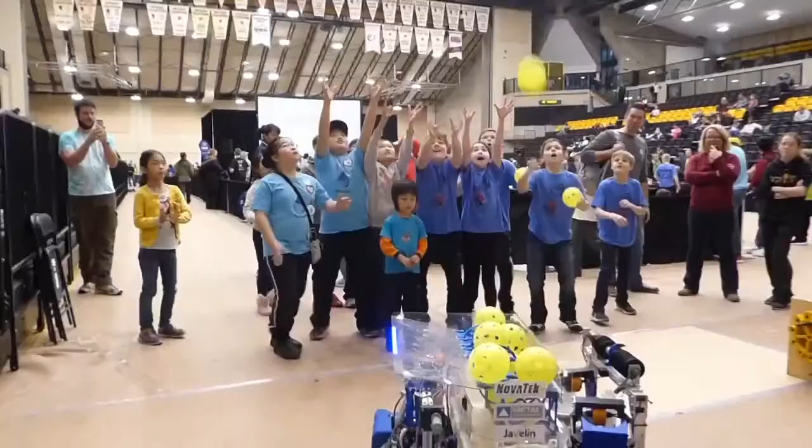It takes is a spark of curiosity, of interest, of delight, to ignite a flame of passion that burns brightly and sends lives onto a new path. We are the spark. We are the Rebels.

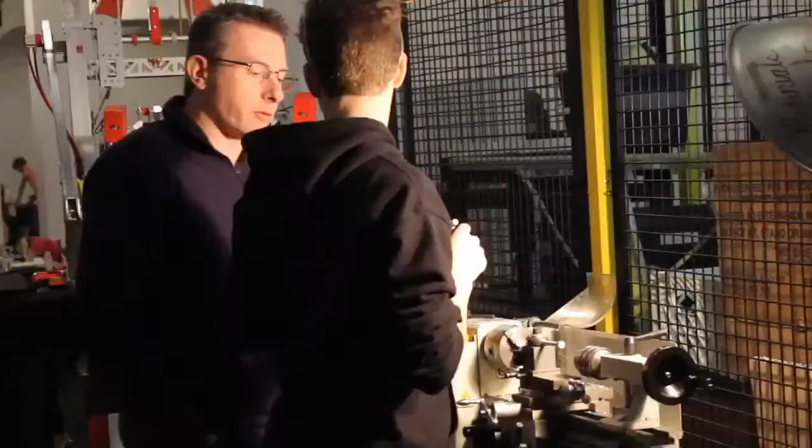Our team started in 2008 at Eastwood Collegiate Institute, making us the longest-running FRC team in Waterloo Region. Like a spark, we started out small and grew. In 2017, the Rebels became a community team, accepting students from all over the region and tripling in size, making FIRST more accessible to all students in our community. With this increase in members, our passion for innovation and discovery grows. Despite our size, we kept the mindset of a small team, encouraging all students to explore every aspect of the FIRST program, providing hands-on training and learning opportunities that change lives forever.

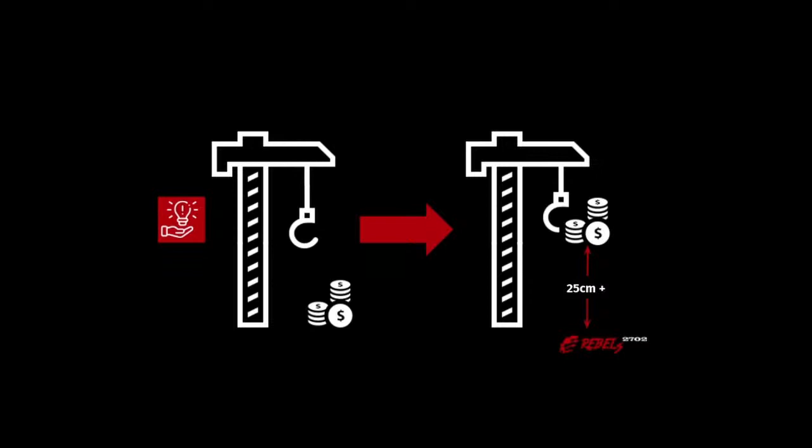This design challenge is the Elevation Challenge. Your goal is to elevate — that's a fancy word for lifting — different coins up a certain height to earn as many points as possible. Your elevator is going to need to be very strong if you want to pick up a lot of coins. Don't get too worried about how you're going to do this when you have so many ideas, because we will help you narrow them down and give you some tips on how to take on this challenge.

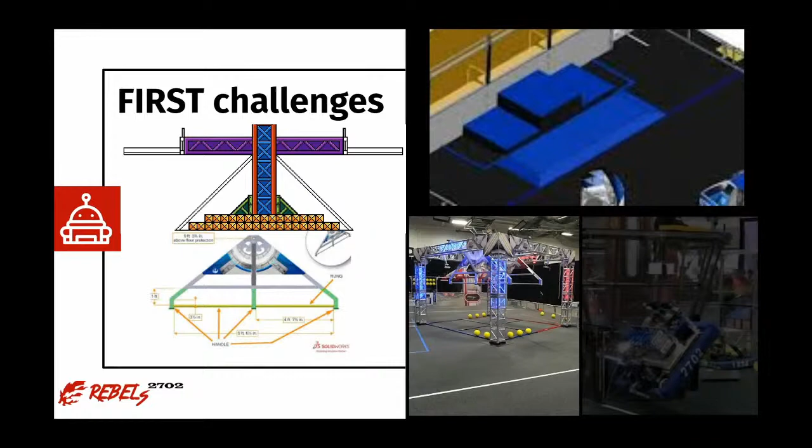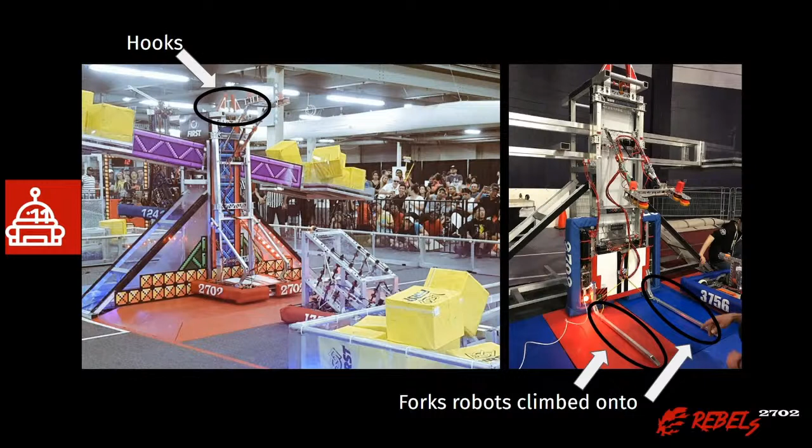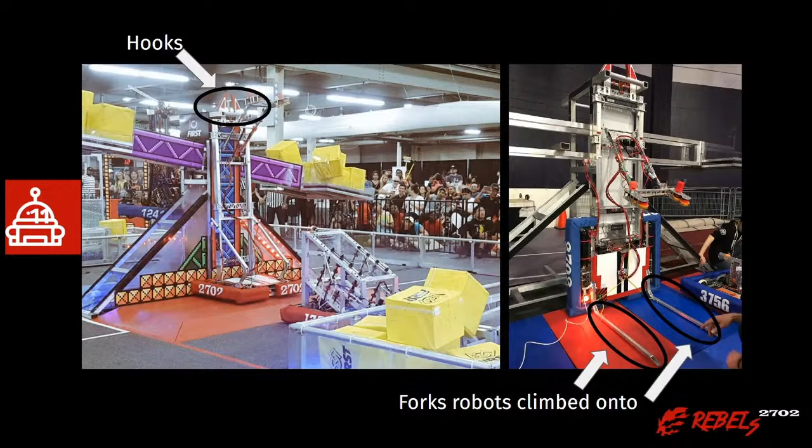The 2018 Climber Challenge was to grab onto a bar 7 feet up. It was a smaller bar that couldn't fit all 3 robots on the Alliance unless they had a smaller climber mechanism. The climber we built had 2 hooks that went in between the sides of the bars to hang on to them. To make sure another robot could climb on, we had forks that flipped down. Here's how our forks flip down.

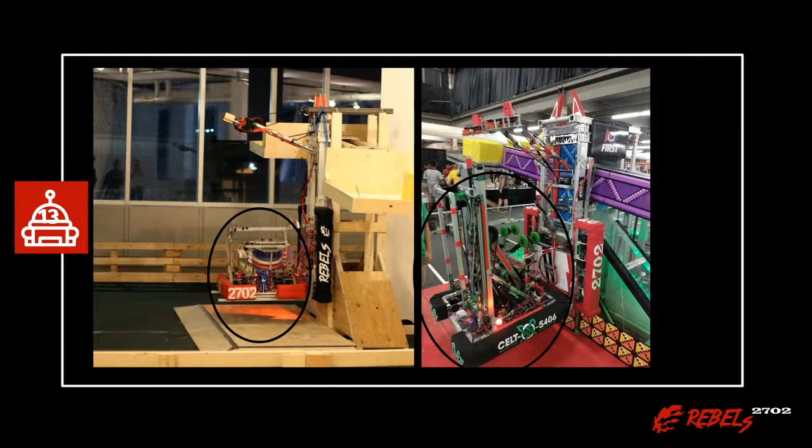After the forks extended, another robot could drive onto them. This allowed us to raise both robots up 1 foot.

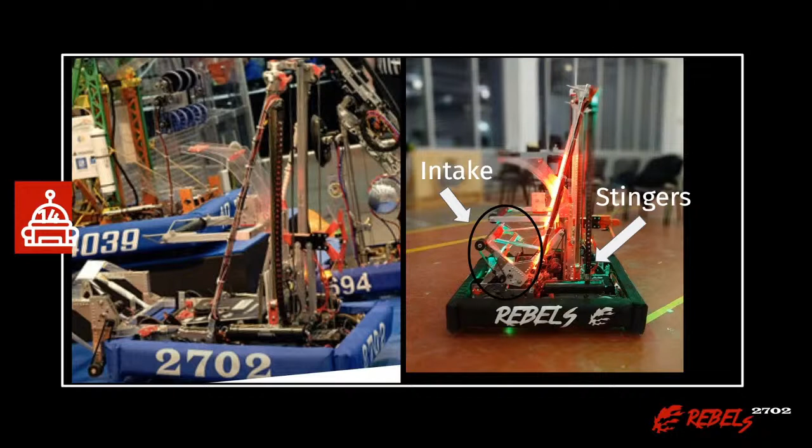Our 2019 robot had a climber that lifts the robot up a set of stairs. It uses the intake and another subsystem we call the stingers to climb up the stairs. The stingers are small poles that extend out from underneath the robot to lift the robot's back, as the intake raises the front. As we move forward, the wheels will approach the platform. Once the wheels are on the platform, we drove the rest of the way up.

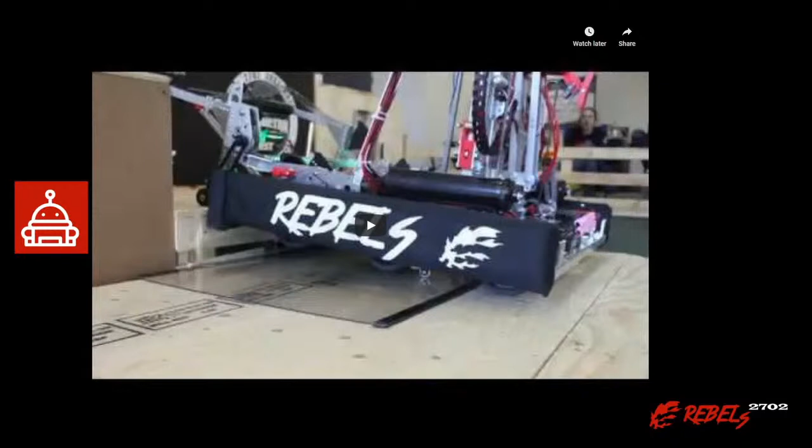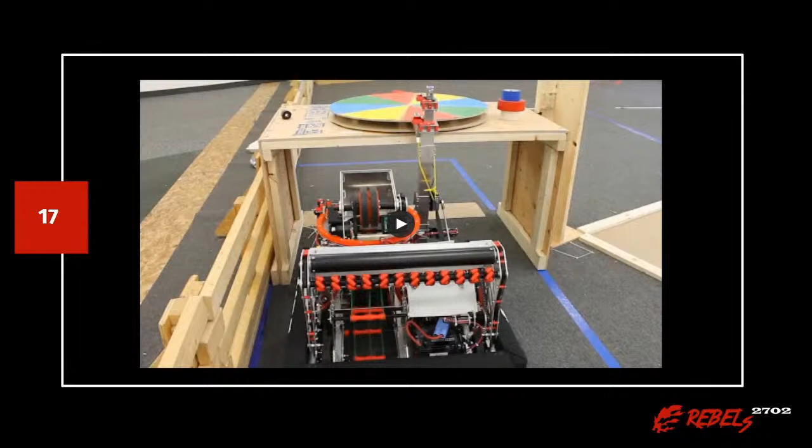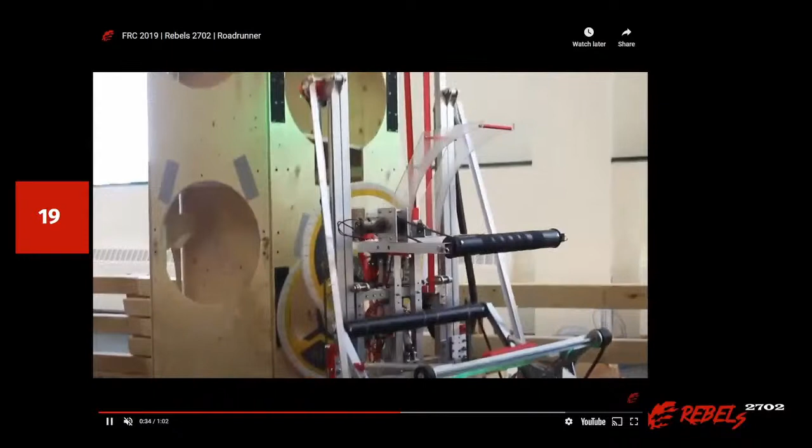Our 2020 climber lifted up our robot after attaching onto a bar that could swing. There is a pneumatic cylinder which pushes the arm up or down for the climber. For many years, our team has used pneumatics on robots. Pneumatics is pressurized air that's used to move pieces. Our 2019 hatch grabber also moved up game pieces using pneumatics to pick up and place game pieces.

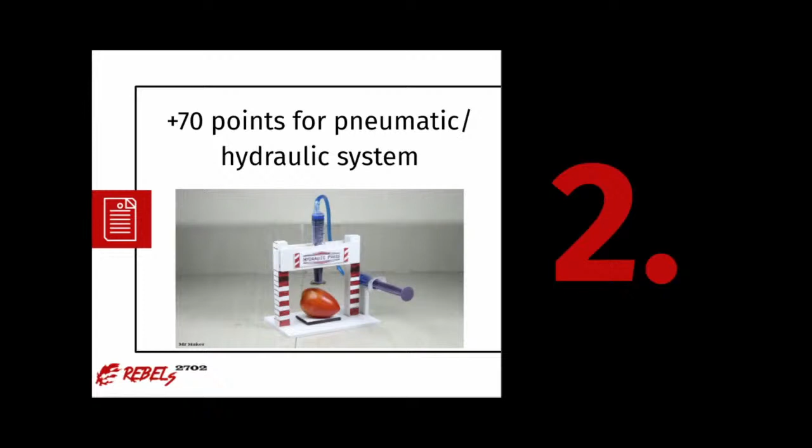Second, because the main theme of this livestream is pneumatic systems, we'll give you an extra 70 points if you use such a system in your design. So, unless you have 70 points worth of coins, use a pneumatic system. But don't worry, Jessica will show you how to build these systems in a bit.

Third, all your coins have to start within 5 centimeters from the ground, meaning that part of your mechanism can be under the coins at the start. But if you're just 1 millimeter above 5 centimeters, you're immediately disqualified. Just kidding, but seriously, don't put your coins more than 5 centimeters above the ground. It's just not cool.

Fourth, you have to lift all your coins at least 25 centimeters off the ground. But if you're a show off and decide you want to lift them like half a meter instead, be my guest. You won't get any extra points, but judges do like fancy designs.

Fifth, once you lift your coins, you're going to have to keep them up there for at least 20 seconds in order for your points to count. Now, however, showing off will be worth it. For each extra second you can keep those coins up there, you'll get 2 extra points, for a maximum of 30 points or 15 seconds.

And last but not least, when you're done lifting your coins, you have to bring them back down gently. Don't let them crash down. Imagine riding an elevator that would just freefall every time it went down. You'd be a pancake. Please treat your coins with care.

Woo, and that's basically it. Please note though that you can only indirectly operate your mechanism, meaning that you can't just lift the coins with your hand, or lift the container that's holding the coins. In fact, you shouldn't be doing any lifting at all. I mean, then what's your mechanism for?

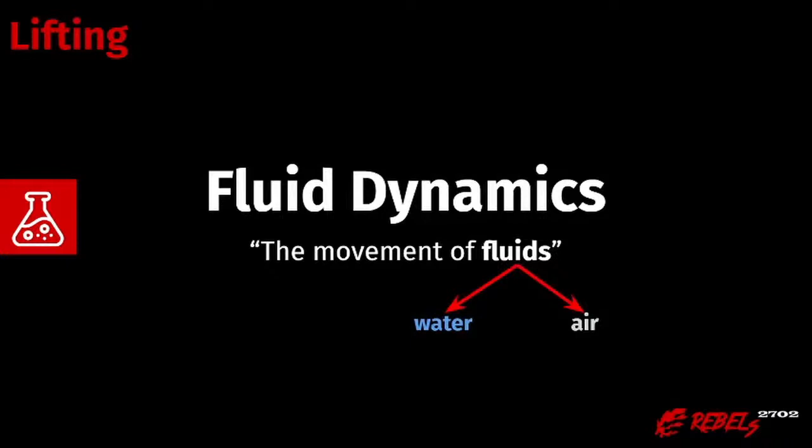Now, to really see the difference between water and air, we need to try to push both with a stick. Let's zoom into the cup and see what happens. When we apply our force, aka push, down, there are molecules in the way, so we have to push them out of the way. But there's nowhere for them to go in the direction down, so the molecules we're pushing push other molecules to get some space, and they start pushing down and to the side. Then those molecules that are being pushed to the side do the same thing, except this time they're starting to push up. This results in the molecules rising up, because that's the only place they can go, which means that our pushing force that was originally going down has been redirected to go up.

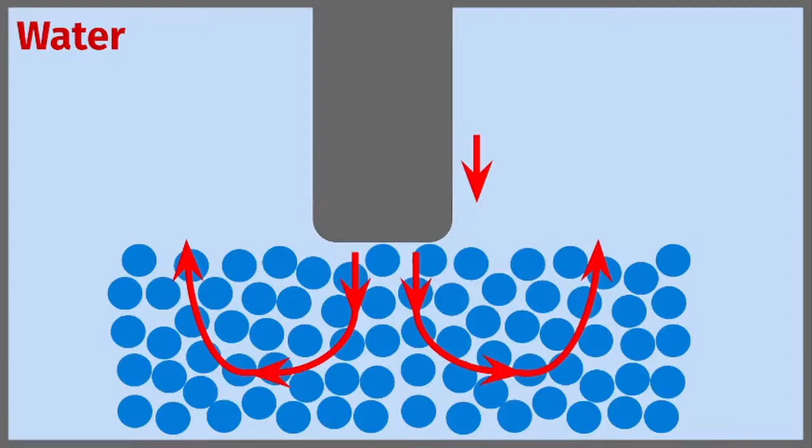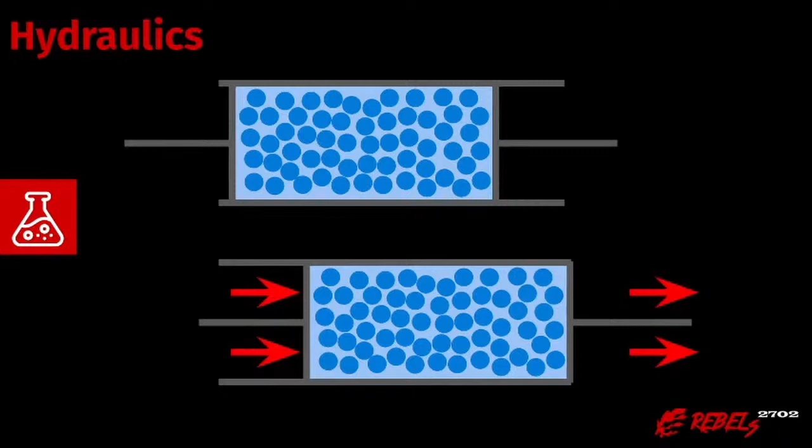So how do people use water to move things? When pushed, water has to go somewhere. The way hydraulics work is by pushing on a liquid, making it so the only place the liquid can move is by pushing something else out of the way. This means that when we apply force to one side, it gets transmitted to the other side. The great thing is it doesn't matter how bendy the pipe is.

But how can hydraulics move something really heavy or extend really far, like a dump truck's offloader? When the force applied travels through the pipe and the pipe's diameter gets smaller, the liquid molecules can't get any closer, so the same volume of liquid that travels through the large pipe must also go through the small pipe, meaning whatever's on the end of the small pipe gets pushed further and with greater force. To make pistons extend really far, instead of a stick pushing the liquid, people use a tank and a pump, opening or closing valves to extend or retract a piston.

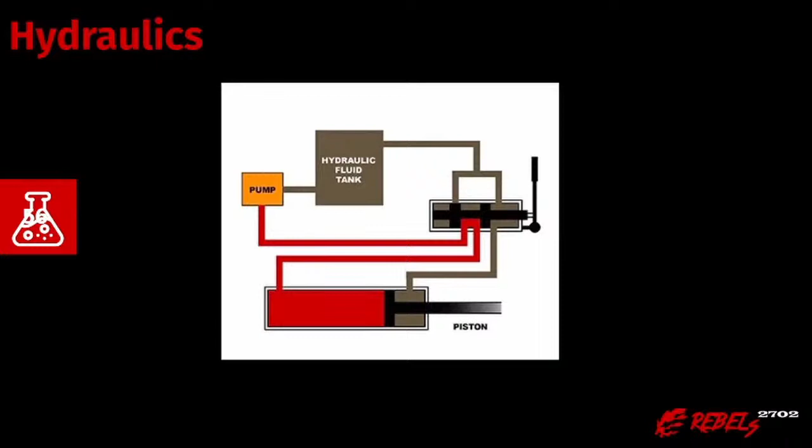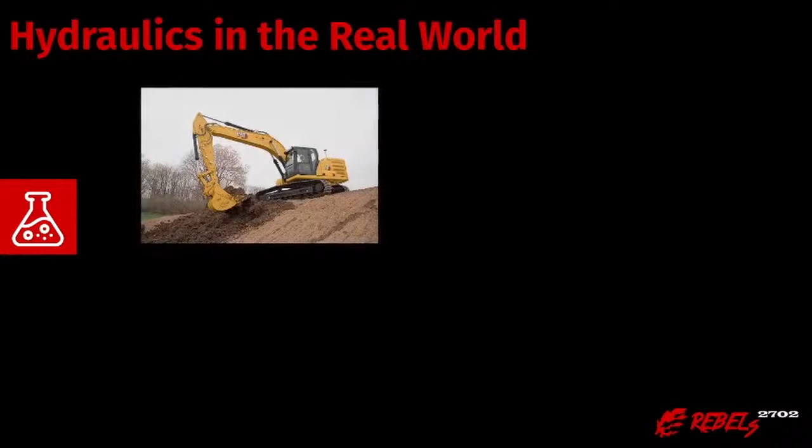Where do people use hydraulics? Typically in places where we need to move something really heavy but speed doesn't matter, like in the arms of an excavator, the offloader of a dump truck, or the press of a hydraulic press.

Now you might be wondering how we can use pneumatics. Pneumatics and hydraulics are kind of similar, but pneumatics works slightly differently because air molecules have a lot of space between them. If we replace the liquid in hydraulics with air, the force won't be transmitted as well, since when pushed, the air molecules just get closer together, a bit warmer, and only very slightly push the other end.

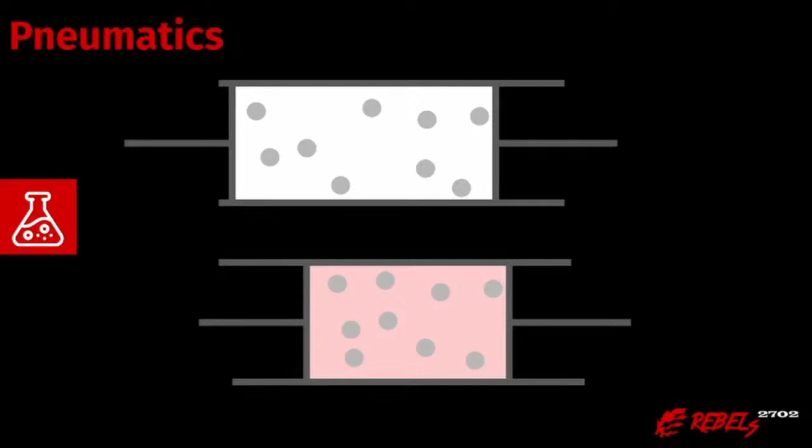That's pretty useless, so instead, what's most commonly done is to have a tank store the air, like in hydraulics. But instead of a pump to move the air, there's an air compressor that compresses a bunch of air into the tank. This means the air is already exerting a force, and all we have to do to take advantage of it is open a valve or two, and the air will rush out and push whatever we want it to push.

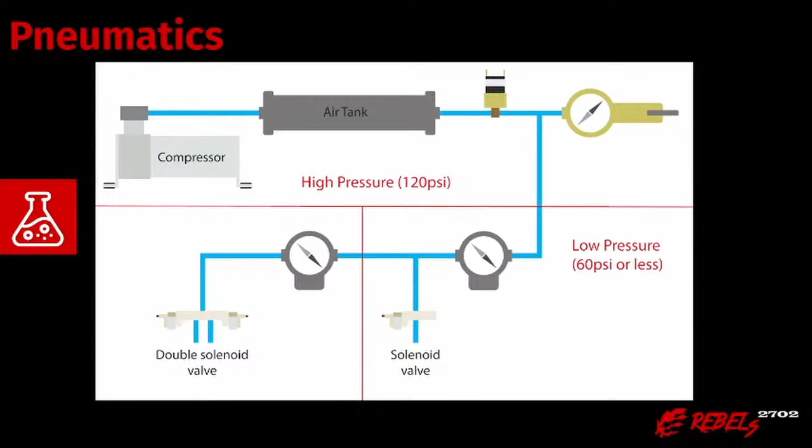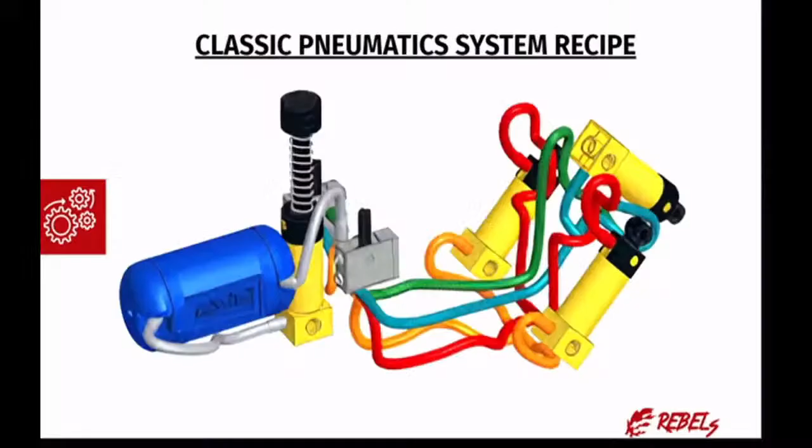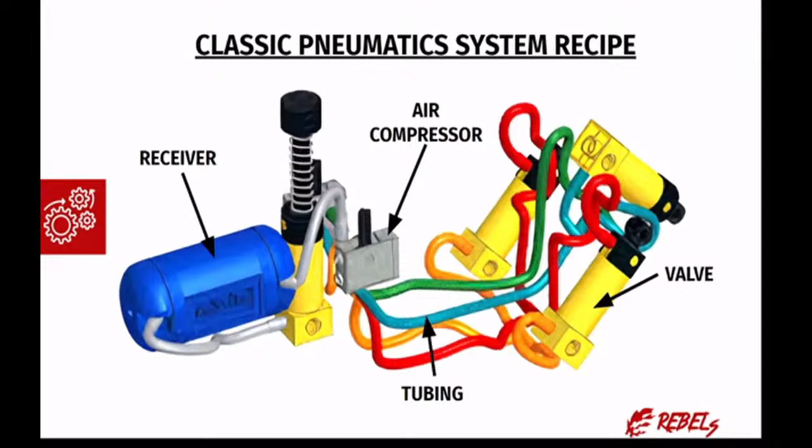Let's start by looking at the general recipe for how to make a pneumatic system. Like Michael said, a pneumatic system compresses air to control and move objects. Most pneumatic systems need a constant supply of compressed air, provided by the air compressor. An air compressor sucks in air from the atmosphere and stores it in a high-pressure tank called the receiver, the second ingredient in your pneumatic system. Then the compressed air is supplied to the rest of the system through a network of tubes that transport air to various locations, and valves, which control the flow of air through a tube.

So you may be wondering, Jessica, why are you in a kitchen? I'm in a kitchen because designing an intricate pneumatic system is very much like creating your own recipe.

Emphasis on creating. Sure, we've all baked before or seen someone bake, but most of the time they're following an already established recipe. You don't see all the hours and trays of failed attempts that go into making a delicious, perfected cookie recipe. In designing a recipe, bakers experiment with different measurements of ingredients, the order they should be combined in, and sometimes they'll even swap out one ingredient for another. They need to figure out how long baked goods will stay fresh, and how to keep them from going bad.

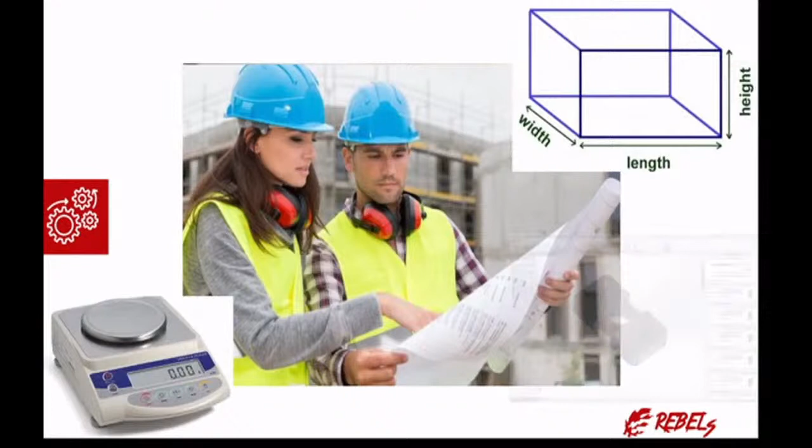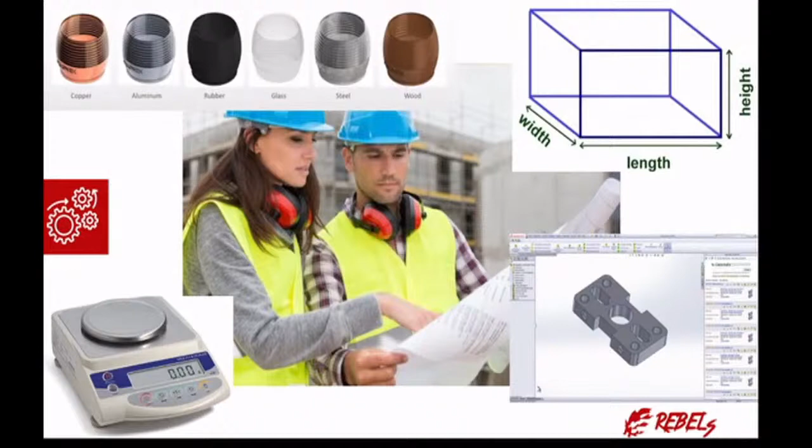Just like bakers, engineers have to play around with the measurements of their component sizes, such as length, width and height, their weights, and their shape. They have to try using different materials with different properties to serve a certain purpose. They have to figure out how the components will be put together or assembled, and they need to know how long their mechanism can last before parts need to be replaced, and also figure out how to keep the mechanism functioning for as long as possible.

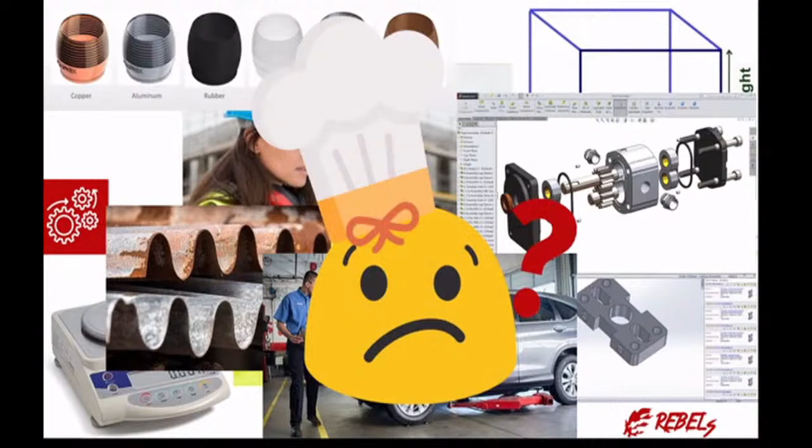Still not getting it? Take the example of a cookie. A cookie has 4 basic ingredients: sugar, butter, an egg or 2, and flour. Each of these ingredients has a general role in making a cookie a cookie. The sugar obviously makes a cookie sweet, but it also helps the cookie spread out so it's not a lump, and even gives it a crispy texture. The fat in butter adds flavor to the cookie and makes it soft and chewy. Flour basically holds the whole cookie together, providing structure, and an egg's liquidy nature helps bind the ingredients together. These ingredients are the components of a cookie. By serving their individual roles, they work together to make a cookie delicious.

But it's not like they are the only ingredients that can do the job. For example, have you ever thought of putting applesauce in your cookies? It can replace an egg as the liquid binding the cookie together. It might even make it a little bit sweeter. Applesauce cookies are often denser than normal cookies, but that might not be a bad thing, depending on your tastes. It's a different approach to making a cookie, but the end product is still a delicious cookie.

So as engineers, we need to realize that there's more than one solution to solving a problem, and that different designs and approaches can serve the same function and meet the same goal in their own unique ways. So let's explore the different options that we have for each of the components in our pneumatic system. We'll look at the advantages and disadvantages of each, and then pick the one that best suits our purposes.

So, starting off with an air compressor, you're going to need something that can suck in air from the atmosphere. The simplest solution would be just to use your own lungs as the air supplier. When you breathe in, you're sucking in air into your lungs, and it'll stay there until you exhale or pass out. Another less tiring solution would be to use a bicycle pump, if you have one, which can pump more air with less of the huffing and puffing.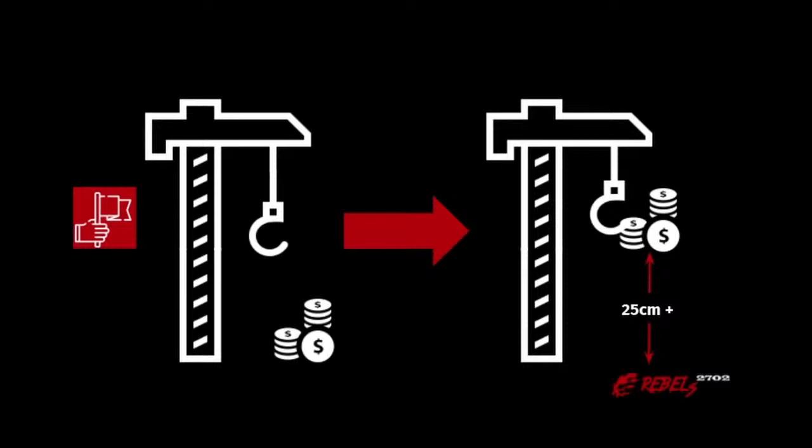The 2702 Rebels Elevation Challenge will get you to think about how to move simple everyday objects like coins in new and innovative ways. The goal of today's challenge is to make a mechanism that can lift up as many coins as possible 25 centimeters into the air. The more coins you pick up, the more points you can score. For all the rules, check out our PDF in the description.

Just like the other challenges we have done, you can use materials that you find in your house, like straws, cardboard, or fun-colored paper to build your mechanism. This is just a short list because you can use anything you want as long as it isn't a material that can easily start a fire, a radioactive substance, or an explosive device.